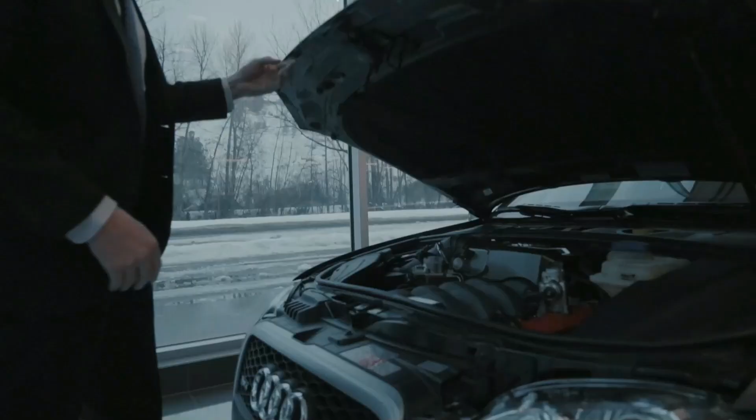We're back at Racing Greed with the B9 S4, but this time we have the TTE710 hybrid turbo from the turbo engineers. We're utilizing stage 3 software from Integrated Engineering, paired with their TCU file, also stage 3 software. Today we're going to see how much power we can make on pump gas. I have not upgraded any of the fueling on this car. If you guys checked out my last video, we showed the install of the vehicle and my first data log, and holy hell does this thing pull way differently than a stock turbo.

We're going to see how much power we can make today, first on 91 octane and then on 93 octane. Now I'm not going to be changing the fuel in the car though, I'm sitting at an E10 blend. So for us in Vancouver, Canada, that is Chevron 94 blended with an additional 10% ethanol, E100 blended into 94 octane fuel, to achieve the best fuel I can while using pump gas.

A lot of my videos previous to this, I always stress how you've got to pay attention to those ethanol contents, because you can get more power out of your car sometimes on a pump gas tune while using a higher ethanol blend. I contacted Integrated Engineering before I did any of this because I really wanted to make sure when I data logged the vehicle, I could see that my high pressure fuel pump was at like 95% duty cycle at E10. I don't want to get any higher than that. So they confirmed with me, E10 is the highest you want to run on these files.

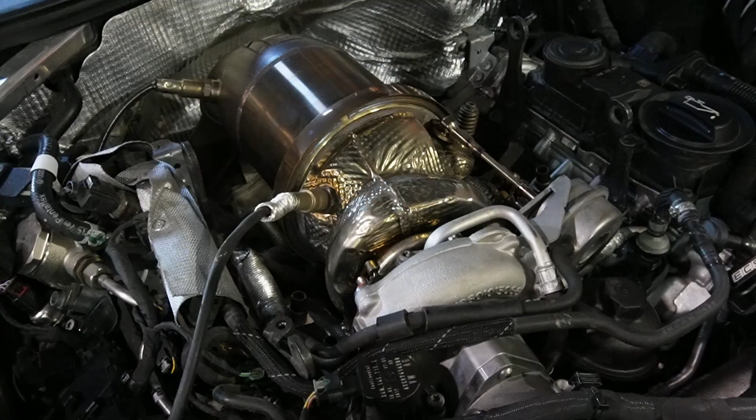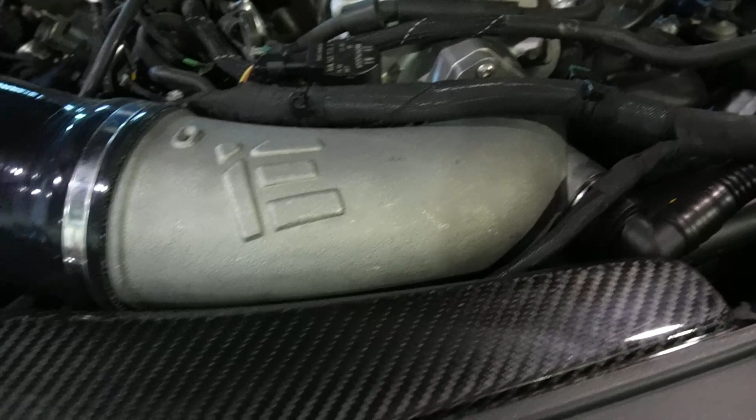So what I'll do is quickly go over the parts I'm using on my car and then we'll get to these dyno runs. As for the hardware, we are using the TTE710 hybrid turbo from the turbo engineers. That leads into the Integrated Engineering downpipe, which then leads into the Integrated Engineering mid pipes - I know those are hard to see down there. I'm using a CTS turbo charge pipe, IE turbo inlet, IE air intake, as well as an IE intercooler.

Now you know the software and the hardware I'm using, but what about those ambient conditions? It is the warmest that I've ever dyno tested this car, and the highest density altitude I've ever had while dyno testing this car. I know I'll make a bunch more power, but maybe not quite as much if the conditions were cooler. I think right now it's about 26 degrees Celsius - I apologize, Americans, for not knowing exactly what that is - and we're sitting at about 1700 DA already.

It's a hot one out here, guys. I'm sweating like a pig already.

I needed to remind you all, these are Mustang numbers, this is not a Dynojet calibration - Mustang dyno uncorrected numbers. Here we go.

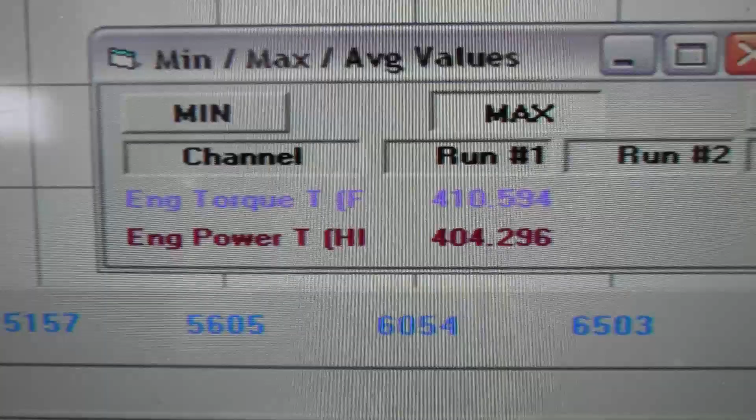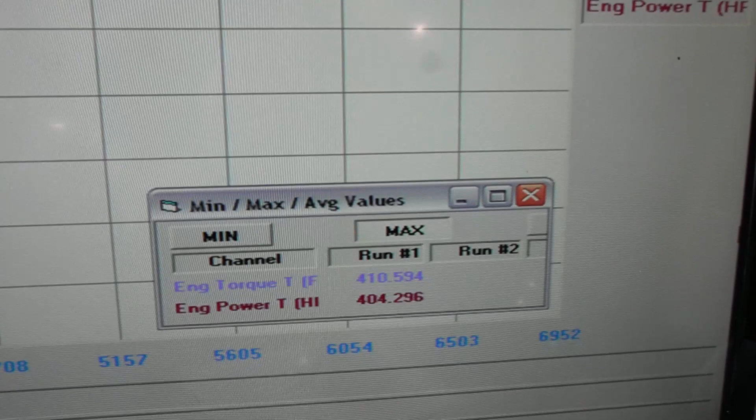Here's the graph and results of our first runs using the TTE710 stage 3 with 91 tuning: 404 wheel horsepower, 410 foot-pounds of torque. We lost a ton of torque versus what I was able to get with that stock turbo, where we were way up over here - I'll do a comparison at the end of this video. Then the torque does carry nice and smooth all the way to the end, whereas the other turbo starts to drop off much sooner. As for the horsepower, it grows and grows all the way up to about 6,800 RPM - it did not do that on the stock turbo, which started falling off way back here. So I'll be interested to see how much more power we can make on the 93 octane tune now.

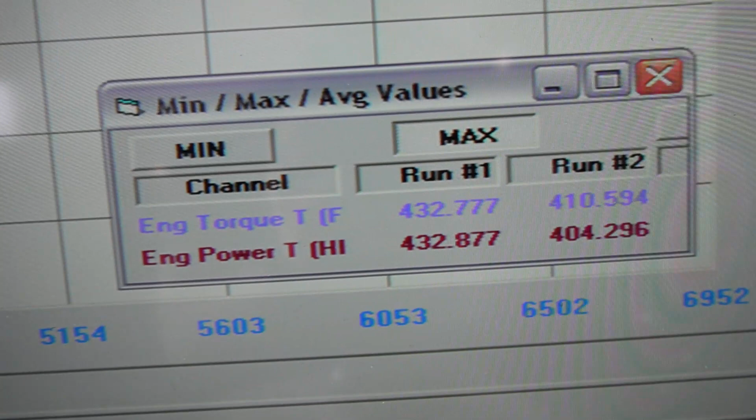Time for the 93 octane results versus the 91 octane results. We've gained another 28 wheel horsepower and another 22 foot-pounds of torque just from a tune change, 91 to 93. 432, both for horsepower and for torque at the wheels. You could see a consistent gain throughout the entire pull in every shape and form.

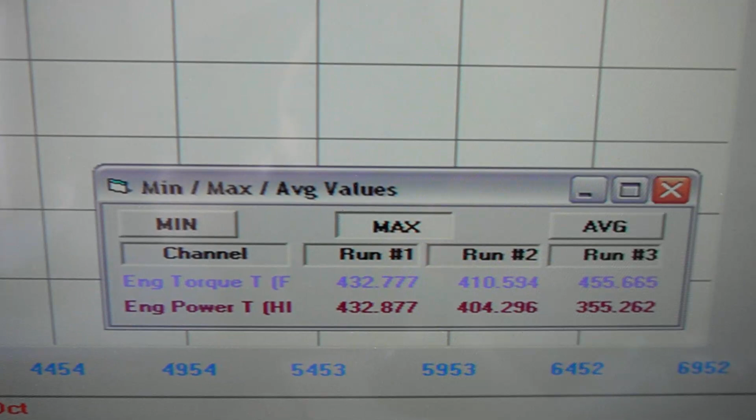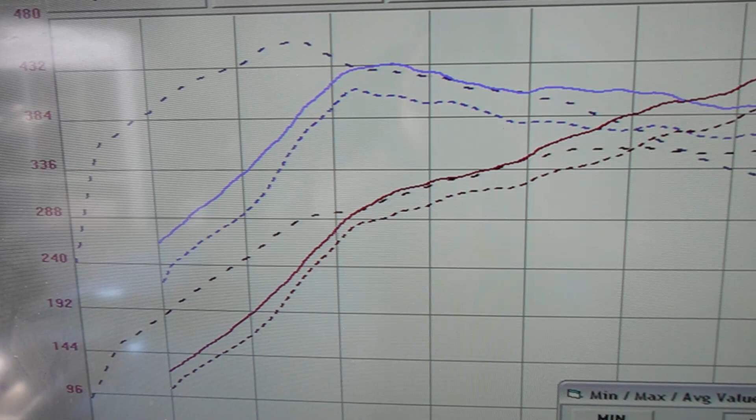So now that we have those numbers, it's time to compare them to what we were able to do with the stock turbo. My second and last comparison of the day will be what we accomplished with pump gas on a stock turbo versus what we accomplished today. That's nearly 80 wheel horsepower more from the turbo. That is pretty incredible. Now these are with a stage 1, 93 octane tune, but as I've shown in the videos, they're almost identical between the stage 1 and stage 2.

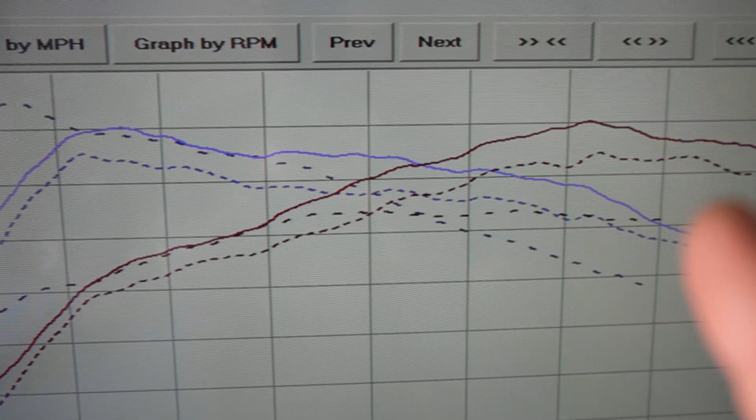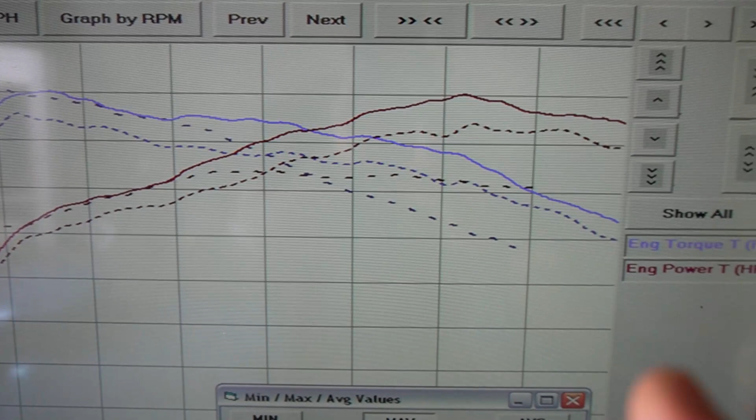Check that out, guys, that is extremely impressive. Now again, we do make more torque down low with a stock turbo, even on pump gas. That's about 3,000 RPM, 3,200 RPM, we see that. But in terms of power and torque with the TTE710, from roughly, where is that? About 4,400 RPM upwards, everything is significantly better with this TTE710. Gobs more torque, gobs more horsepower, all the way up top to that 7,000 RPM red line using pump gas, but with a TTE710. Here's the graph I've been waiting for, guys.

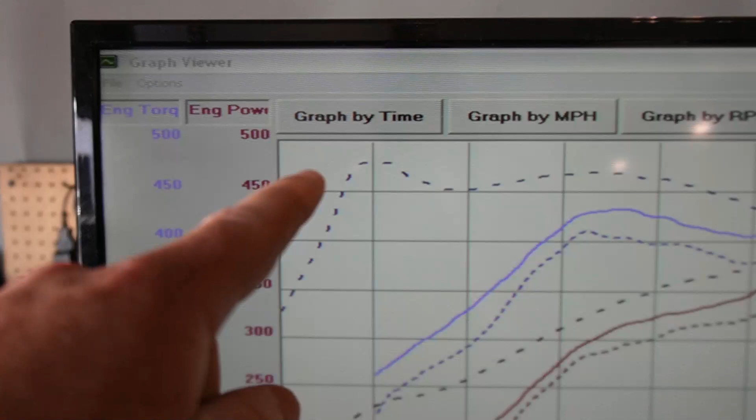Stock turbo versus TTE710, 91 octane and then 93 octane. This was the best run, the final run, stage 2 E85. Look at those torque figures. We lost a significant amount of torque dropping down to pump gas from E85, all the way up here. Look at that, it's as low as like 2,500 RPM on the stock turbo. Just insane amounts of torque down low, but then it plummets up top.

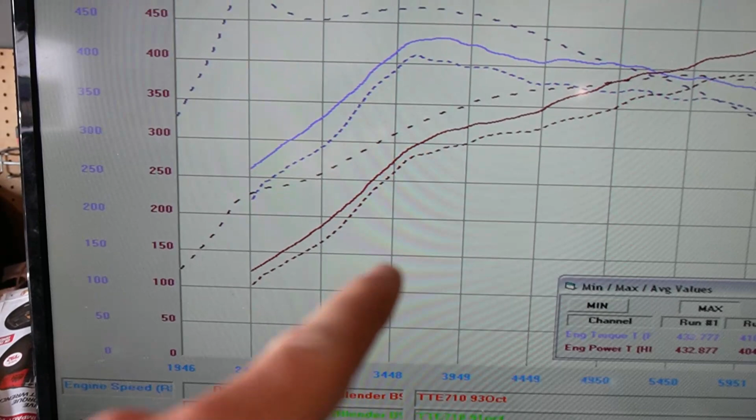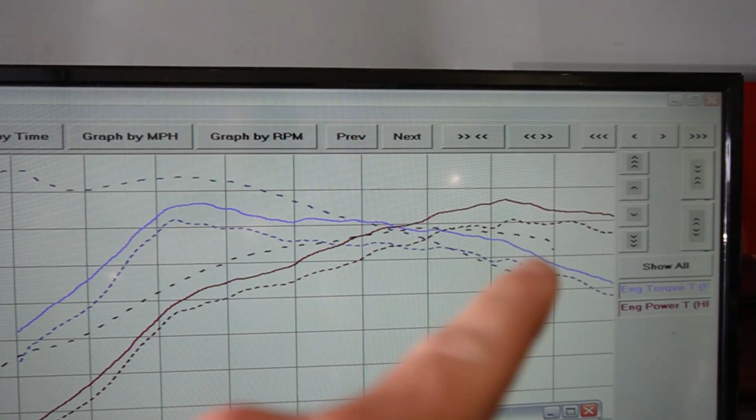Whereas on pump gas with the TTE710, you're waiting until 3,600 RPM before you have the full amount of torque you can get. But in terms of horsepower, there is no comparison. You peak, I think it's about 5,500 RPM with a stock turbo, and then you just die. Whereas this TTE710 just climbs and climbs and climbs, looking really strong and really healthy on this pump gas tune. It's gonna be even crazier on ethanol.

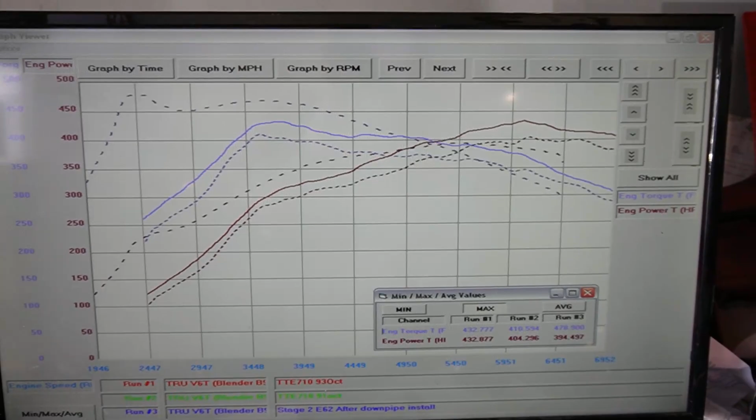So we're finishing off today making 432 wheel horsepower and 432 foot-pounds of torque on this all-wheel drive Mustang dyno, showing uncorrected numbers. Well, that wraps up another successful dyno session here at Racing Greed.